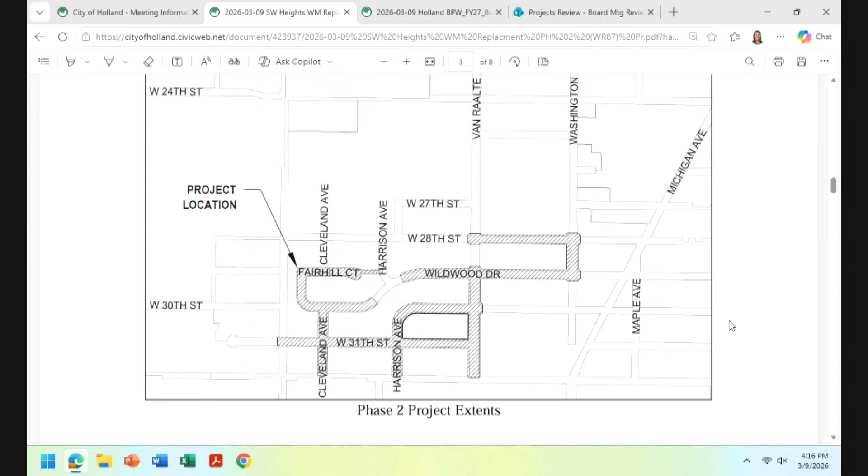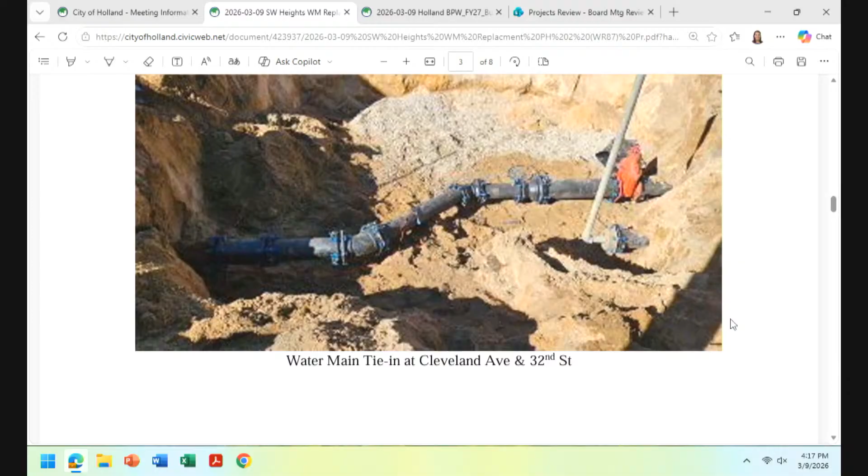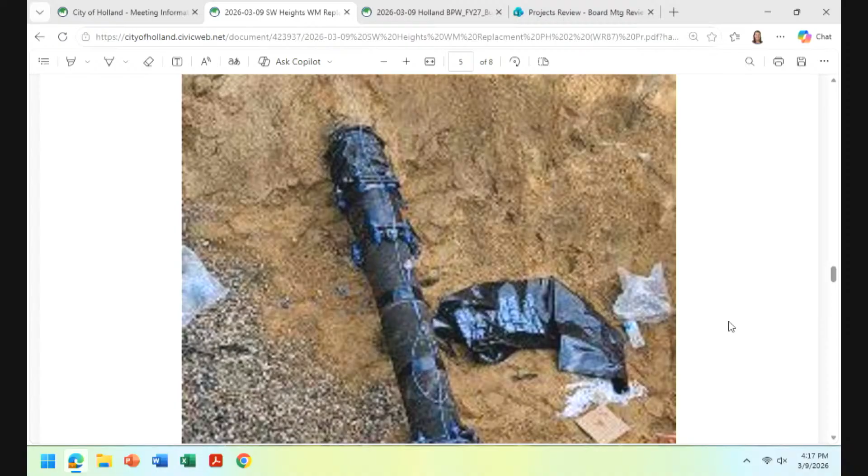So if you go down there, it shows a tie-in at the south end of the project, at Cleveland and 32nd, tying the new 8-inch main into the existing 6-inch main. And then we have our contractor putting in a new copper service onto the main, and another tie-in at 30th and Van Raalte.

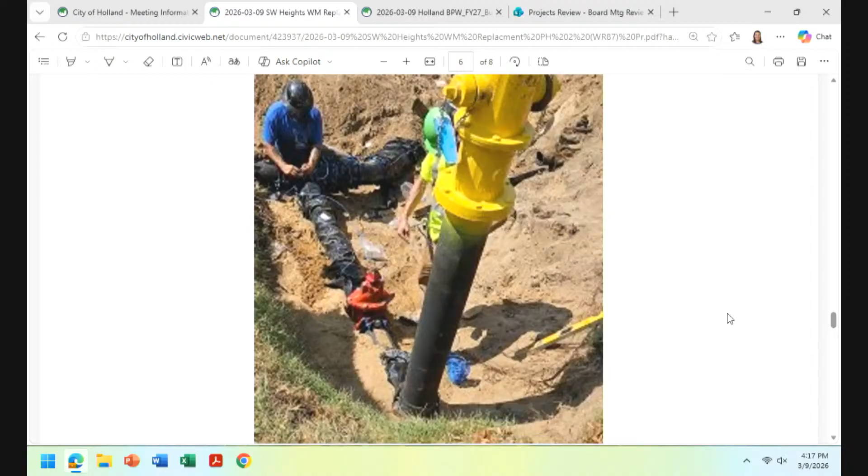Not very exciting pictures here, but I tried. This is a new hydrant install, if you've never seen one before, so that kind of shows you the hydrant lead with the valve in between. Just gives you a snapshot of what that looks like.

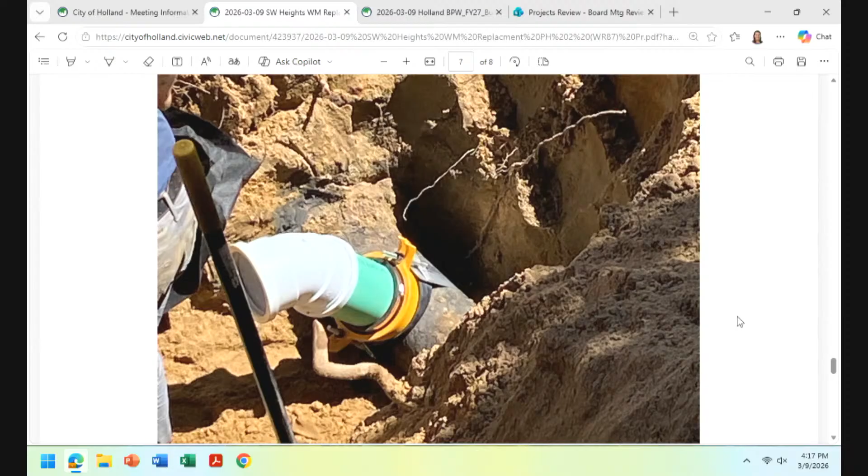And then the next one shows what a new sanitary tap looks like. This would have been for the Orangeburg replacements we did, a new tap run with 6-inch PVC. I think the next photo captures that 6-inch PVC running from the main to the right-of-way. That pretty much sums that one up.

Any questions? No, it looks good. Thank you.

On that main, was that covering some plastic that covers the pipe, the ductile pipe, for corrosion purposes? Yeah, so all of our new main is wrapped. It's poly-wrapped ductile iron pipe. That's our spec, that's our standard. Yep, so all the new main was poly-wrapped ductile.

And that became the standard how many years ago? That's been a standard for a while now. Yeah, and it's also run with tracer wire and was tested and passed, so it all locates well. Taking as many of those measures as we can. Early 90s, was it? Goes back quite a ways.

Thanks, Brian. I know you're sticking around for the second one as well. The next one here is for the 17th Street lift station.

Remember, we waited quite a while to find somebody that brought in a bid that was within what we thought was a reasonable approach here, and it's one of our bigger lift stations, so we're glad to get this one closed out and behind us as well. I'll let you talk in more detail about what happened here.

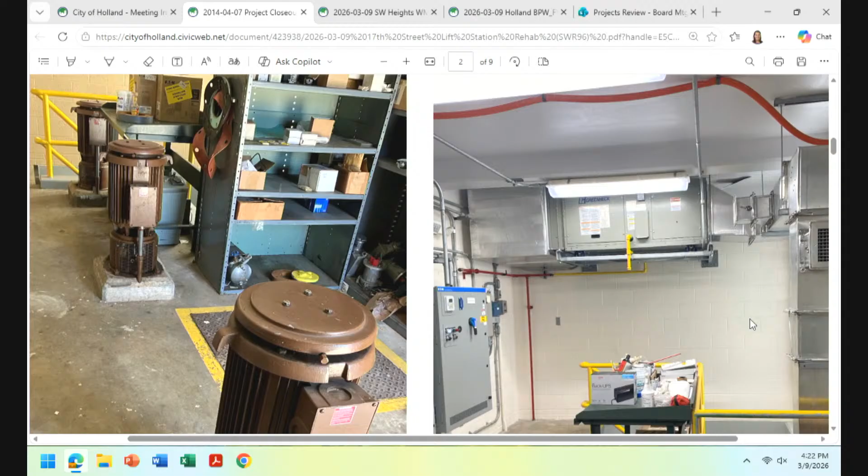If you want to go to the first photo here, I'm showing the old versus the new. On the left, the old, the right, the new. Those small motors there on the little bases are what we were trying to get rid of. Not only a tripping hazard up there, but more so the maintenance headaches that they provided. So we got those out of there, with the pump and motor now down on the base floor.

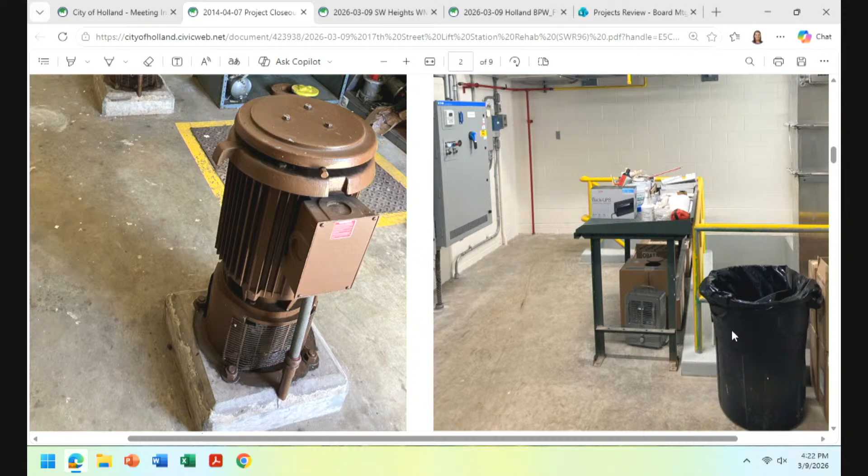And then you can kind of see on the left of your picture there is one of the VFDs. There's another picture later that shows all three, and then some HVAC upgrades with that as well.

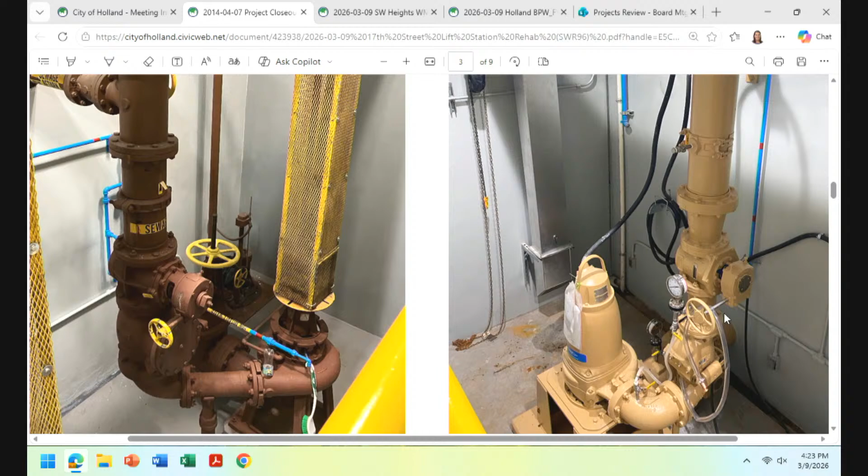And then here is looking at the far pump configuration. The left one is the existing, where you see the yellow cage coming down as the drive shaft. You can see that's not on the new pump there, shown on the right. So again, just trying to provide some enhancements for operations and being able to maintain these pumps much easier now.

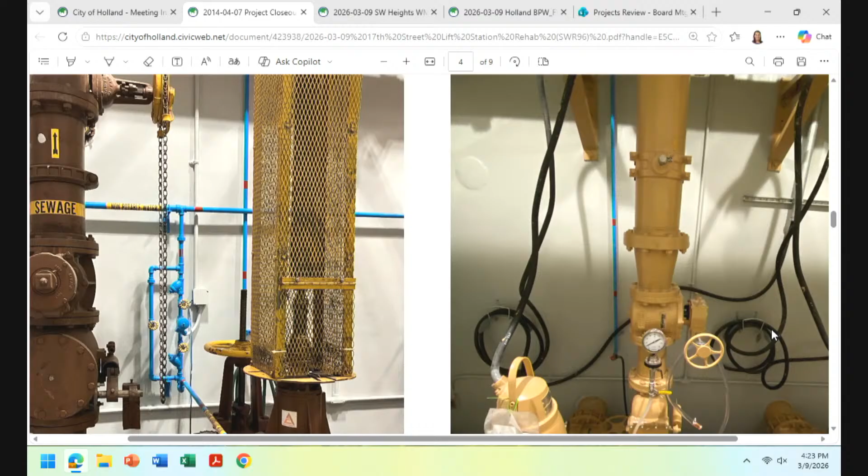And then again, just another look at that, showing what we went from and to. That's actually the exact same pump in this picture. You can see we have pressure gauges on there on the discharge side now. That's easy to see. Air relief that actually has a hose run down to it to be able to relieve air, not spray back at us. Check valves, everything replaced from the pump all the way up to where it discharges just above that in the force main discharge pipe.

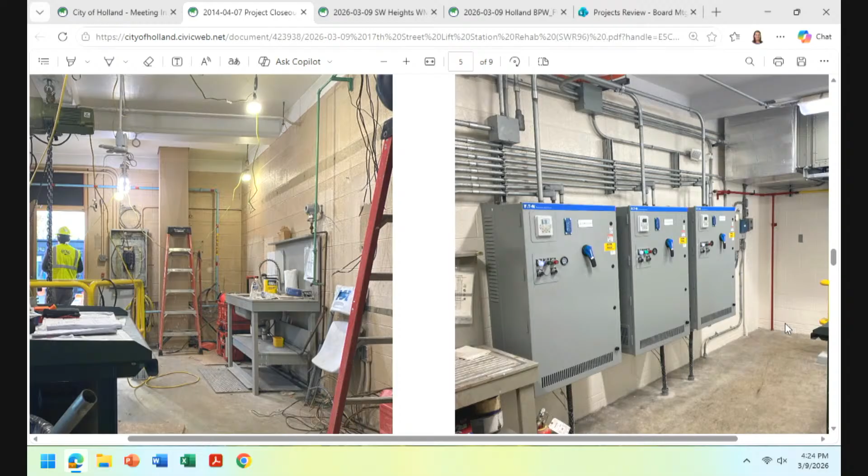And then kind of another one here. This was through construction, there on the left with everything kind of demoed out of there. On the right there, you see the 3 new VFDs where there did not used to be anything, just one control panel.

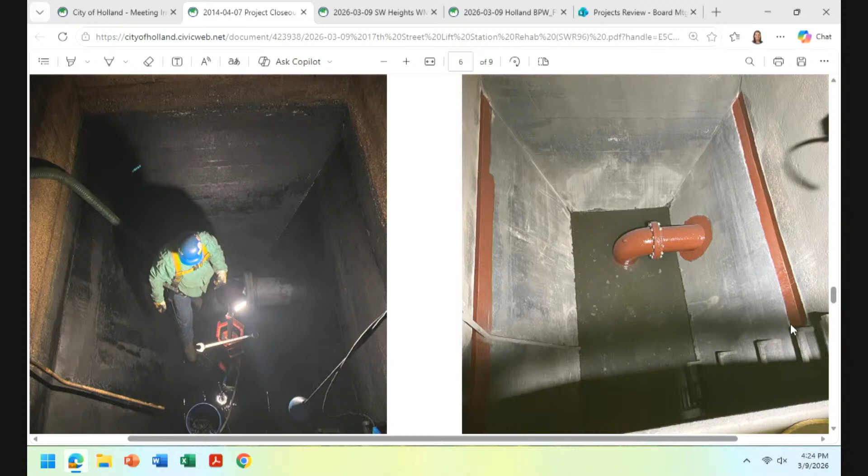And then here's another one through construction. This was after the wet well was pumped down on the left, and they were starting to clean it out. The right is kind of before we reintroduced flow back to it. So we had the suction piping, that's the red pipe you see there, lined. We had a few spots of the wet well actually lined too, but for overall condition, the wet well was actually fairly good for how old it was. Yeah, I just thought that was a cool picture to show.

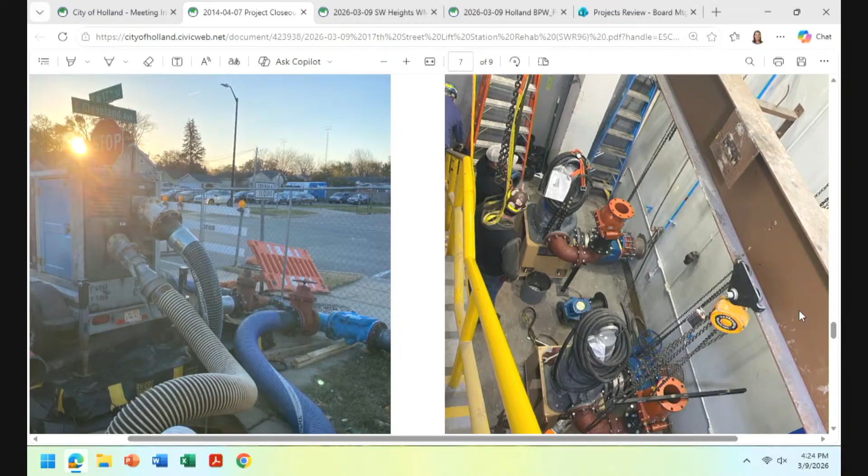There's the bypass setup operation there on the left. And then again, just showing construction of the new pumps being put in and everything working on the mechanical side of installing the pumps and piping.

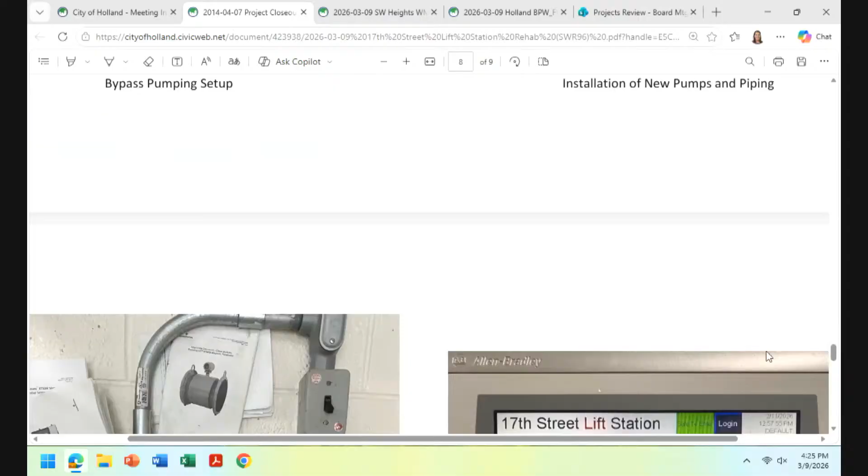And then here is, again, just some updated controls. We have our flow meter, that's the one in the middle there. And then the left is our radar HMI screen to be able to view what the level is of the wet well. The right is our HMI screen that connects with our PLC. It paints the picture of what the wet well looks like, the floats, how it's talking, which pump is being called to run, just really can tell you anything you want to know about how the station's operating, and allows you to control it here on the screen.

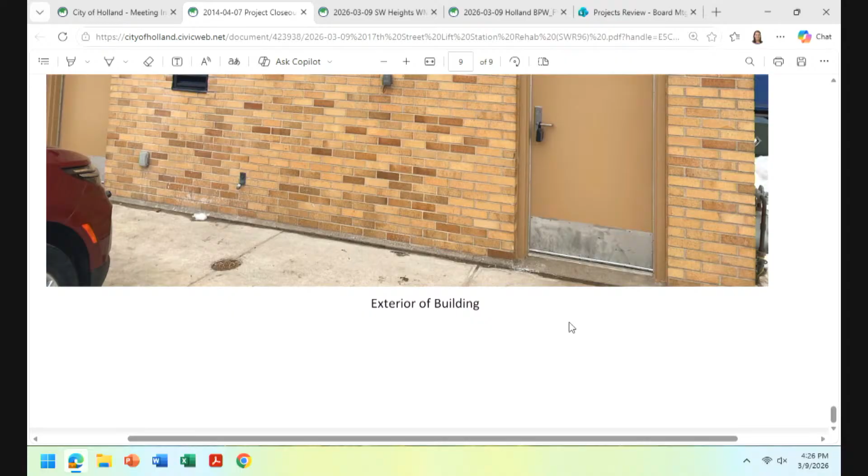I think that's it. Any questions?

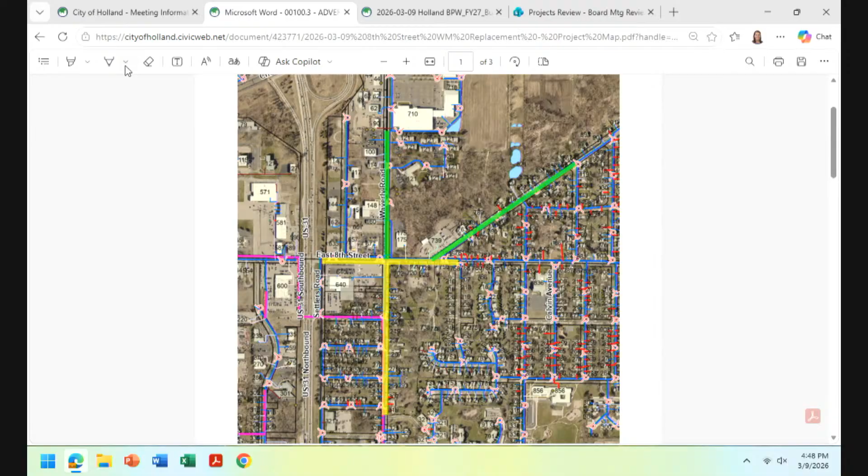For this project in particular, we did bid this out to several local area contractors that we've worked with in the past. We received 2 bids for this one, one from Milbocker and one from Wyoming Excavators. Milbocker being the low bid at $4.76 million.

And I should state too, we did also include an alternate within this to be able to capture a portion of Holland Heights. That was our hope, that with the budget we had, we could do a portion of that. Unfortunately, with the pricing we got, we're sticking to just the base bid, knowing that we have that kind of in our back pocket if there is budget availability to do some work into Holland Heights, in that west corner by Pawpaw and 8th there.

So this is for a request for approval of a contract with Milbocker and Sons of $4.76 million, with a 10% contingency of $476,612, for a total amount of $5,242,741.85.

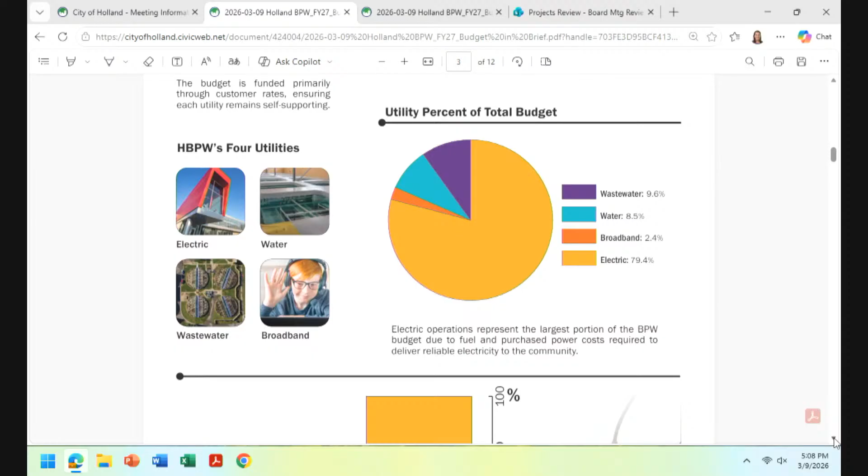So overall, what does that look like? So the majority, if you take the full budget, goes to electric - that's about 79.4%. And then next would be wastewater at 9.6%, water at 8.5%, and broadband at 2.4%. This gives a good highlight - electric operations represent the largest portion, and that's really due to the fuel and purchase power cost required for delivering that electricity to the community.

So looking at electric specifically - the electric budget came out to about $122.1 million. Aside from that $3 million positive reduction that we talked about verbally but hadn't updated our PowerPoint last time since we had just learned of it that day, it's really no new content or meat to the information from when we talked last.

Again, I want to talk through some of the attachments, which include our proposed rate changes as well. So some of the rate changes on the electric side that impact this utility specifically - no overall percentage rate increase, but we did have some changes to our Rate D. We deleted the energy-only language in that rate; that was a 2-year street lighting project to upgrade city lights, and it's been completed. So all lights have been moved and are now to full maintenance rate, so that rate's gone.

For Rate K, we also added renewable energy standard charges to the MBT section. It basically added the new charge to be called renewable energy standard charge, and the rate's about $0.0007 per kilowatt hour. So that was added as well. One thing to also discuss is that LIEAF surcharge that started last September.

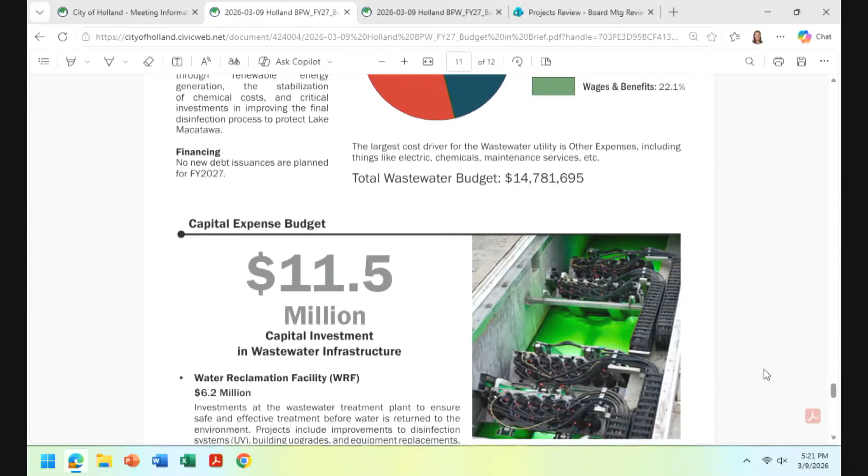They have a capital budget of 11.5 million, with about 6.2 million to be invested in the water reclamation facility - things like the continuing disinfection system upgrades, the UV system upgrade, and some building equipment upgrades. And then another 5.3 million for wastewater collection, which is a lot of sewer main replacements.

Along our community, one thing I wanted to point out, and I know it was discussed last time we talked, is that there's a sewer main replacement project for the 40th Street sewer replacement that does have partial funding from EGLE accounted for as well. So not all of the 5.3 million would be an obligation of the BPW.

So that kind of brings us to the final slide, and I know Dave talked through this as well, but a big thank you to everybody. It starts in October for a lot of the staff. My staff really start in August, preparing all the schedules and documentation that goes into building the scratch pads for the budget. So a big thank you, and a huge thank you again to Julie Cook, who's here as well - she really did take my vision and make this into a beautiful document for, I think, our customers and ratepayers to use to get the high level gist of our budget.

So, any questions or anything?

Could we have a motion to approve this budget? I'd like to make a motion that we approve the fiscal year 2027 budget and associated rate adjustments and forward to the city council for inclusion in their resolution approving the budget for fiscal year 2027. Support. That's a motion by Lily, supported by Lynn. Any further discussion or questions?